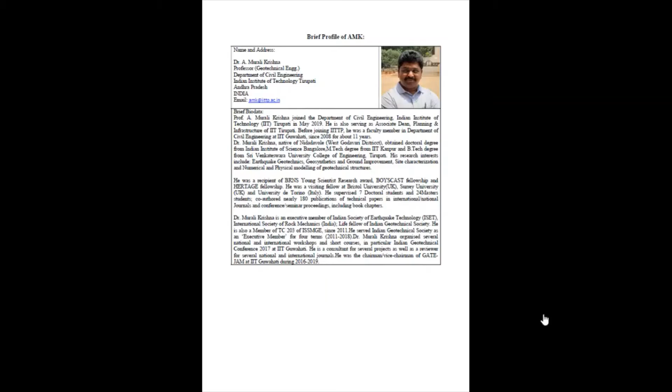Just want to know how many participants are there and who all are there. I can see only a couple of participants, something like that. And how many among them are students and how many are faculty, just to have some idea. Do you have something?

So we have almost around two sections, around 280 students plus faculty around 20. How many joined in this webinar? As of now, around 120, including faculty and students. They may still be joining.

Okay, fine. Coming back to the talk, today I have chosen the topic: sustainable utilization of scrap tire derived geomaterials for civil engineering applications.

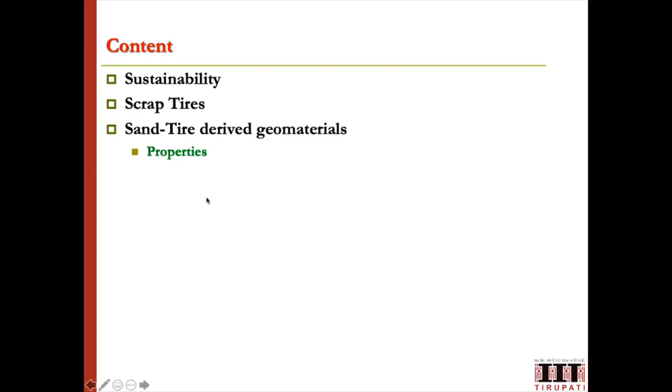The talk will go like this: I'll briefly touch upon what is sustainability, what are the primary components of sustainability, and we'll see some information about scrap tires - what are scrap tires, what are the problems associated with them. Then we'll see the word geomaterial and scrap tire derived geomaterials - what are the various scrap tire derived geomaterials, what are their properties.

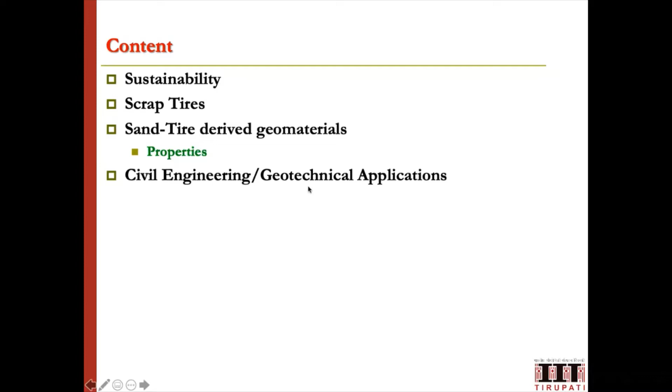Then we'll broadly see various applications in civil engineering, particularly focused on geotechnical applications, and then retaining wall applications, which is basically from my research and my students' research efforts. One master's student and one PhD student worked on using scrap tire derived materials for retaining wall applications. I'll try to explain these applications through model studies and how we are addressing sustainability. The sustainability aspect will also be touched at the end, and then I will conclude with my concluding remarks.

This is broadly the content I have taken here.

Most of this presentation is based on the publication 'Sustainable Utilization of Scrap Tire Derived Geomaterials for Geotechnical Applications,' published in the Indian Geotechnical Journal in 2018, by Dr. S. Bali Reddy, who was my research scholar, and Professor Krishna Reddy, my collaborator. I hope you've all attended his lecture when he visited your institute recently. If anyone is interested to know more details, they can refer to this paper for more references and information.

Coming to sustainability, I'm not going into the topic in depth because it's vast - we could talk several lectures on it, there is a special course on this one. But as a simplified understanding, what sustainability is will be addressed here.

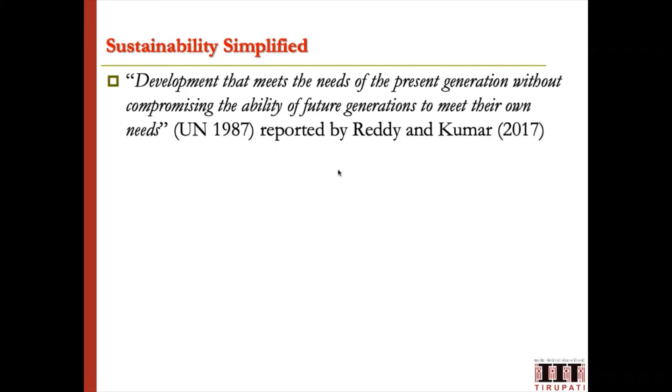Okay, but their requirements also should be able to survive. That's the main object of sustainability over the generations. So sustainability is basically linked with the three E's. It's a triple bottom line concept they highlighted here.

So you see, it will deal with the environment, it will deal with economics, and it will deal with equity. Equity in the sense of society, the people and their requirements; basically societal things will be coming in this equity content. And environment: what are the resources we are trying to use for any application, any infrastructure, and economics at the same time.

For any engineering structure, any engineering concept, we have to balance the economics. So they are all interlinked. The equity, society and environment, they are interlinked. Growth control conflict, as we keep on using the environment more now, and in the future whatever its complications. And similarly, economics, which is linked with this class and property conflict sometimes.

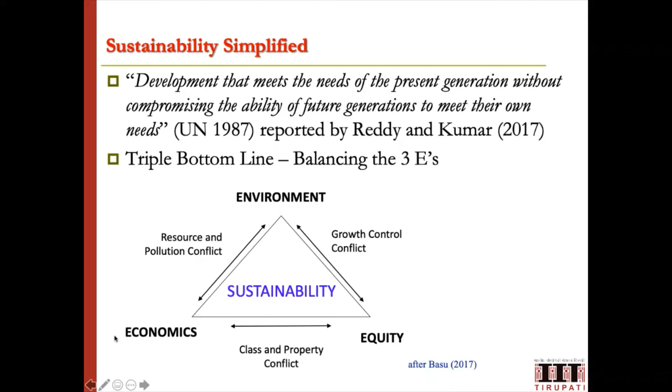If you are making it very costly, the people who can utilize it will be less. And if you make it more reasonably economical, then many people can use this, but they will complement each other. And then environment and economics, again they will be linked in terms of resource and pollution conflict. We have to minimize the pollution when we are balancing the environment.

At the same time, we have to intelligently, smartly utilize the resources as well, which need to be sustained for generations in future. At the same time, we have to balance economics. It should be an economical project. So they are all interlinked.

In a nutshell, maintaining this environmental need, economic need and equity need in terms of the societal requirements: if you are generating any project, any product which is meeting the present day requirements and which can also help the future generation with their requirements, that's how we can maintain sustainability. That's basically sustainability in simplified terms. We will see how sustainability is related to our today's topic.

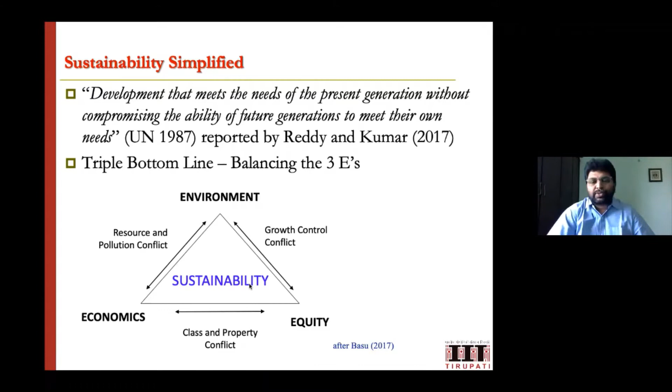So in future, the increase will be significant in developing countries like India. Of course, now we are almost functioning like developed countries, but still we are on the verge of some sort of development. We can see a much higher level of development.

So what are the issues with scrap tires? As mentioned in the earlier slide, the rate of generation is very significant. You see huge amounts of scrap tires are being generated. What is the main problem? They are bulky materials, like in this form, used materials. These are all from small regular motorized vehicles.

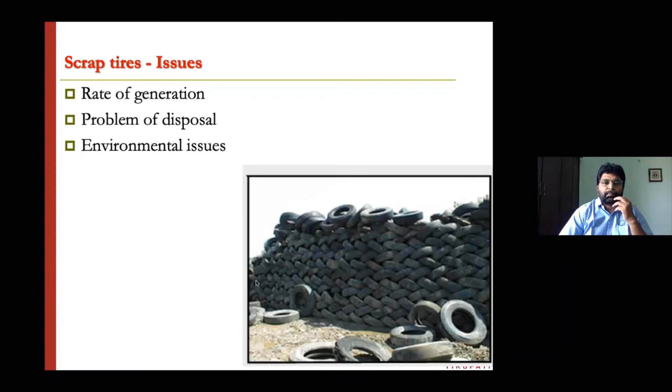So the way to solve these particular issues in a sustainability approach is to see the possible use of these waste materials for various applications. This is the sustainability approach. That means, what is the approach here? A waste material we are trying to use for some application.

That way we can consume some of the waste material, and we can also reduce the disposal of the waste to some extent. It may not be complete, but to some extent. So accordingly, we can reduce the problem of disposal to some extent, and the associated environmental issues also can be taken care of, because anyway we can't have any control over the rate of generation. Only the second two points can be handled if we properly explore the sustainability approach in the utilization of waste scrap tire material for various applications.

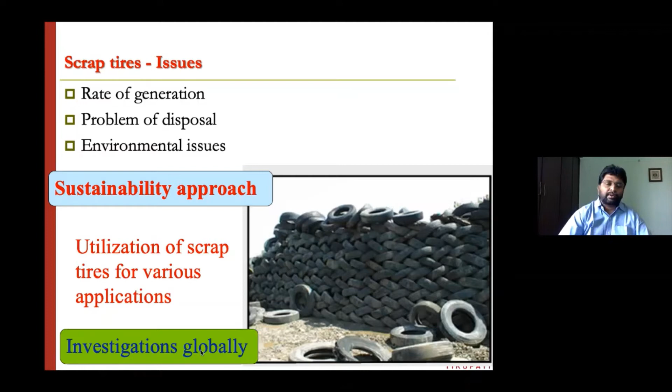So how are they utilizing them? The earlier slide showed some scrap tires are being utilized for various applications. Which industry, which sector is using them? This slide gives you some information, again for 2002. You can see civil engineering application, which is our current focus, is using about 14.2%, whereas other things use different percentages. Another major use here is tire derived fuel. Again, it has environmental issues; it will release a lot of pollutant gases and other things. It is not advised to use it for tire derived fuel, but yes, people are using it in different percentages.

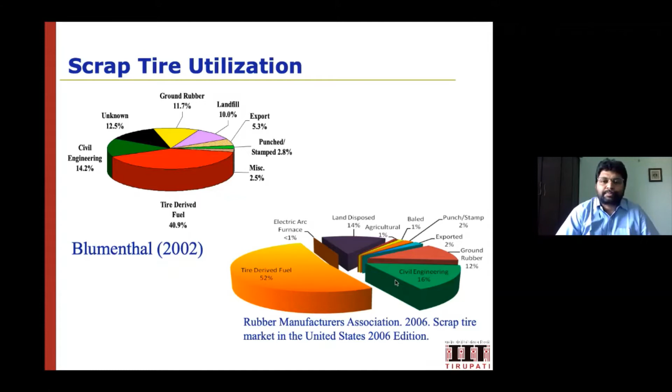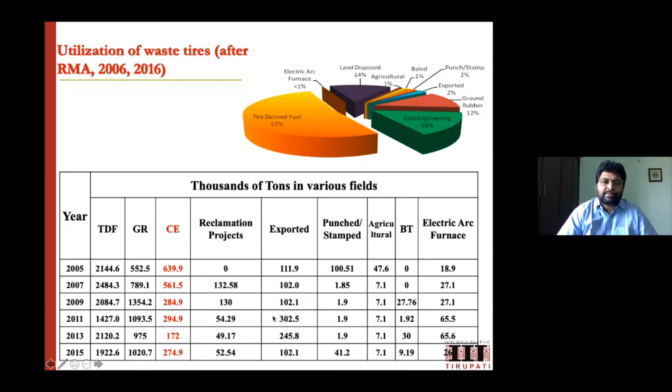Coming to the 2006 statistics, I want to draw your attention to the relative increase in the percentage of civil engineering applications. Here 14.2% was reported in 2002; in 2006 it was about 16%. There is a slight increase in civil engineering applications, so people are using scrap tires in civil engineering. This shows various utilization of scrap tires in more detail across the years 2005 to 2015, in thousands of tons in various fields, such as tire derived fuel and civil engineering application. What to observe here is that for civil engineering application, use of scrap tires is decreasing. So that's some background about scrap tires being used for various applications.

Now, coming to scrap tire derived materials, what materials can be obtained from scrap tires? One way to use scrap tires is to use the tire as a whole, as a very bulky tire which has a lot of mass. Otherwise, we can cut them into different sizes of pieces. There is an ASTM standard on use of scrap tires in civil engineering applications, which is our current focus. This ASTM standard shows the different sizes and what they are called.

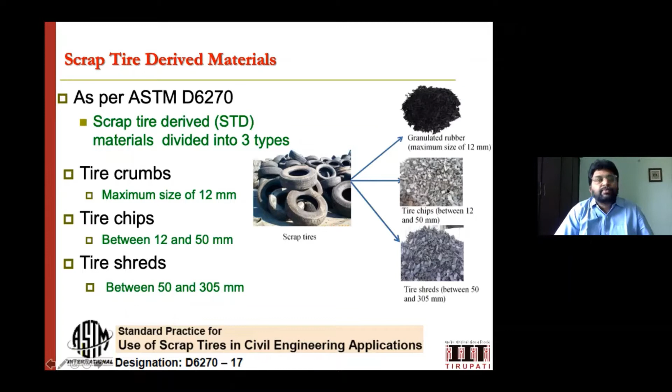It's broadly divided into three types. One is tire crumbs, maximum size of 12 mm, which you will see in this form. Tire chips, between 12 and 50 mm, which look like this. And tire shreds, ranging from 50 to 305 mm, 1 foot size. Imagine cutting big tires into 1 foot size pieces; you get big tire shreds in this form. So depending on the application, one can choose which size of tire derived material is suitable, and accordingly pick that particular material.

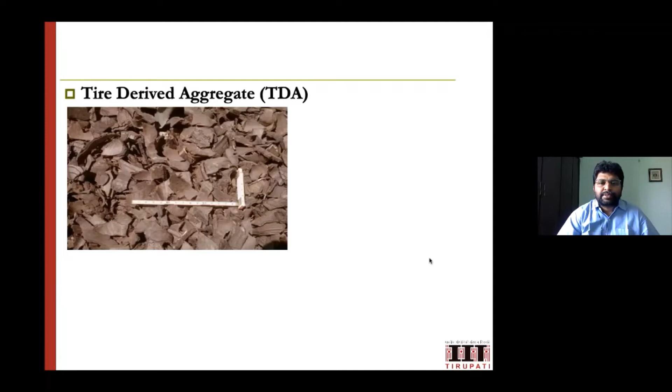So besides this, tire derived aggregate is another terminology which is now being practiced extensively, using the tire with some other material. Then there is crushed rubber from waste tire. Other than the earlier three materials and tire derived aggregate, if you make this into a very crushed, finer form, you can use this as crushed rubber, which was recently reported in 2018.

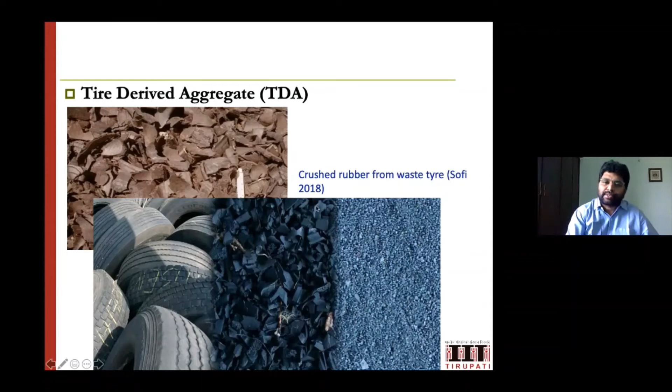Now we understood what scrap tires are and what the scrap tire derived materials are. Now we'll go a little bit into the engineering part of the application. For engineering applications, we need to have the properties of any material. Otherwise, we can't just take the material and use it, because there is a lot of engineering we have to do. So keeping that in mind, several researchers have studied the use of tire derived materials of different sizes, so we need to understand different sizes and their properties also.

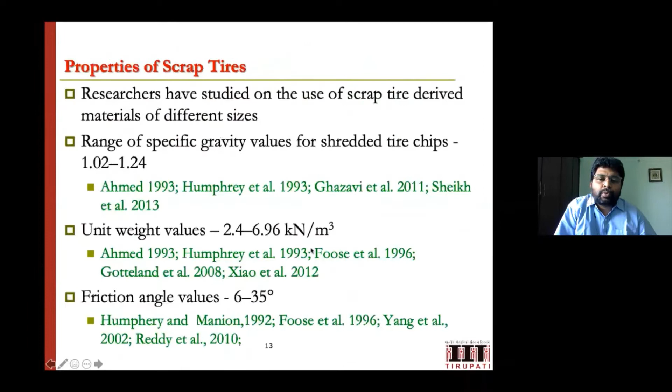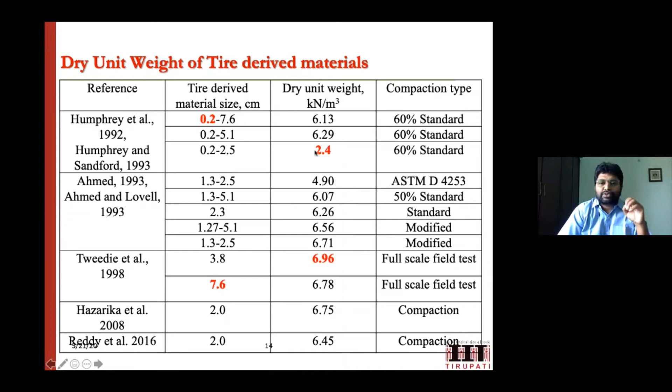And the corresponding values, range of the values, you can see 2.4 to 6.9 we were shown in the earlier slide. And you can see the other engineering properties. For example, hydraulic conductivity is shown here. What's the range of hydraulic conductivity values? What's the range of the void ratio values?

And next, going to the shear strength parameters. So in terms of the C, cohesion, and in terms of the friction angle phi, what's the range of the values? How different sizes of the scrap tire materials they can show. You can see the cohesion values reported here ranging from 4.3 to 82 kilonewton per meter square, and friction angle, as I showed in the earlier slide, 6 to 38 degrees was reported. Okay. So these are different values.

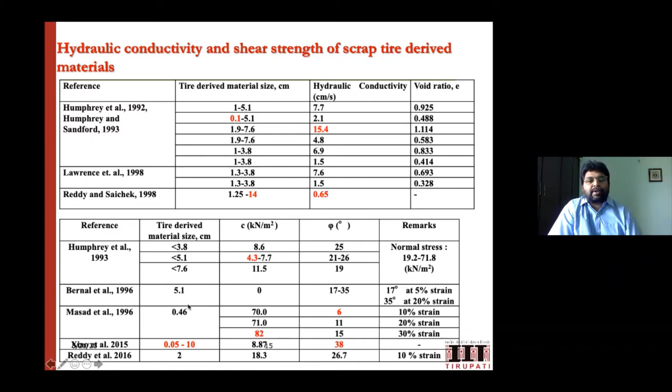Now, so these are the STDs, scrap tire derived materials, and their properties. The use of the STD materials, how we can use them as an engineering application, particularly in civil engineering applications. You can see STD materials are used in a wide range of civil engineering applications due to the advantages in their properties. We have seen the property values, and most of us know the durability of the material.

So it has high durability, low compacted dry density and thermal conductivity, high hydraulic conductivity, and high compressibility, and is able to absorb. When you are keeping the scrap tires, they have a lot of voids, they can get compressed, they can absorb a lot of vibration. This is another good property we can get from the scrap tire derived materials.

So large studies are available on pure sand-tire derived materials applications, particularly for engineering applications, in terms of physical, numerical, and field model studies in the context of retaining walls, foundations, embankments, etc. So here particularly it is focused on geotechnical applications, and different studies have been reported in that.

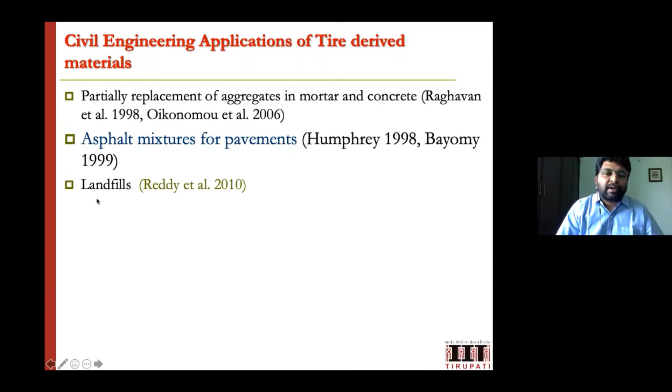Okay, with that, we'll just see broadly what are the different civil engineering applications this material can be used for. One is the partial replacement of aggregates in mortar and concrete, which was reported by these researchers. And in terms of asphalt mixtures for pavements, which were reported by these researchers. They can also be used in landfills, massive landfills, and the backfilling of retaining wall materials, which is the current focus here. That's why it's highlighted here.

Different researchers have used them here, and as we understood from their basic property, they have high permeability, so they can also be used as a drainage material, as a drainage system. Further, it can be used for reinforcement purposes, and highway embankments; not only pavements, they can be used to build huge volumes of embankments also.

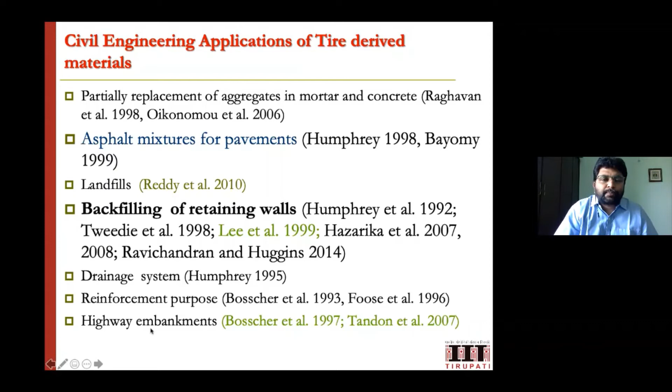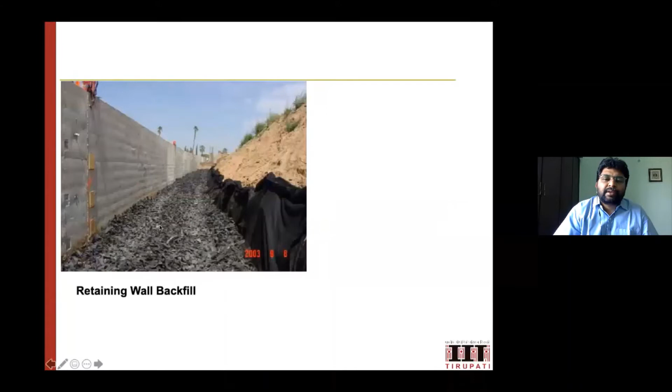And vibration damping layers beneath the rail lines are used, and the retaining wall backfill. There are some studies on the retaining wall backfill with such compressible materials. So protection of seawall by using whole tires; as I mentioned, whole tires can be used directly for protecting the seawall or certain embankments, which can absorb a lot of energy.

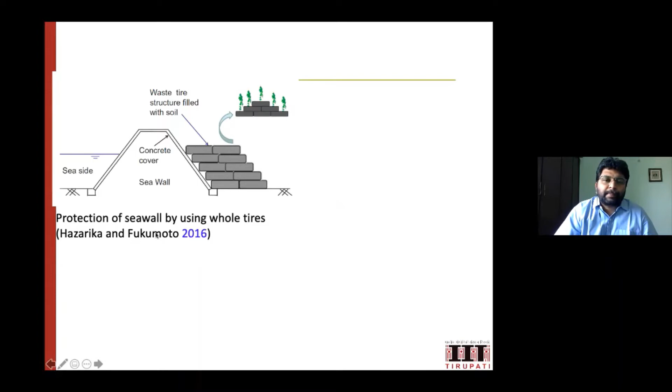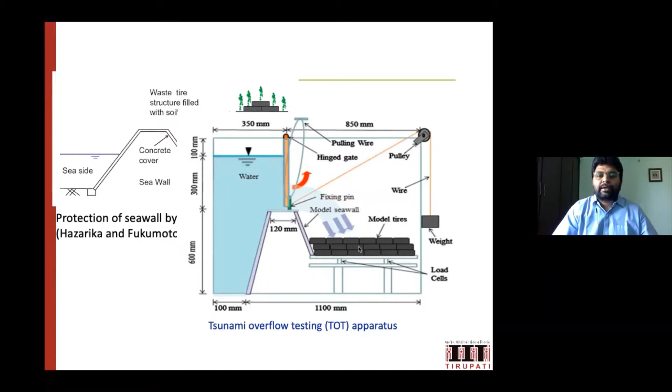Tsunami overflow testing apparatus. This is the study again conducted by Hazarika and group. The tsunami overflow is happening, and if you keep this huge volume of whole tires here, they work like very good dampers. They damp a lot of energy, and further losses and damages due to this water will be very less.

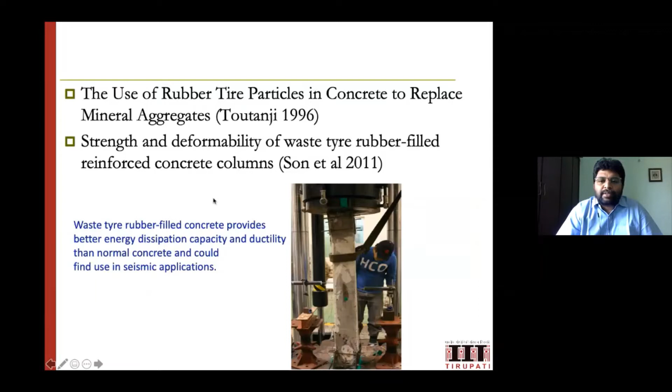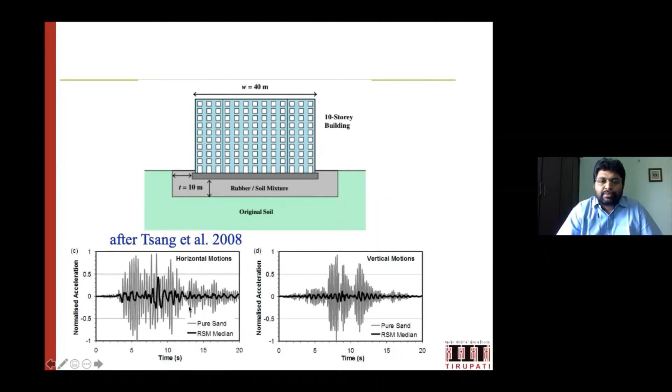This is one study where they showed base isolation using a rubber-soil mixture. A structure at the base uses the rubber and soil mixture, which is being tested to show it is absorbing those vibrations. So that's about civil engineering applications in general: in terms of pavement structures, retaining structures, embankments, even buildings, and tires alone can be used as geotechnical structures also.

Now, coming to the geotechnical applications, what are the advantages one can get when using these scrap tire materials in geotechnical applications? One is that it creates a sustainable future. Referring to the earlier sustainability concepts, right? If you are able to use the tires in applications, you are reducing the waste, you are reducing the disposal problems, and some significant part of natural material is being replaced by this waste material. That means you are reserving some of the natural material for the future generation. So in that way, we are trying to maintain the sustainability.

So it creates a sustainable future, and it can also be used for reducing the vibration. It can also be used to protect the pipelines which are buried in the ground, because it has a lot of cushion and absorbing behavior.

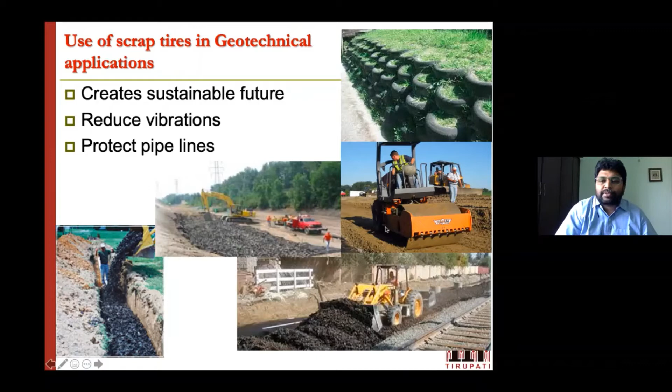Some of the applications again shown in the context of geotechnical applications. Some of these things we have seen earlier also, like whole tires forming a small retention system. It's an embankment, this is a drain system, and a subsurface drain in railway lines. One can see this one. Using the tire mixture in the pavement system. So there are various applications one can think of. Particularly in the earth retention systems, which we'll be focusing on a little bit more, it can be used.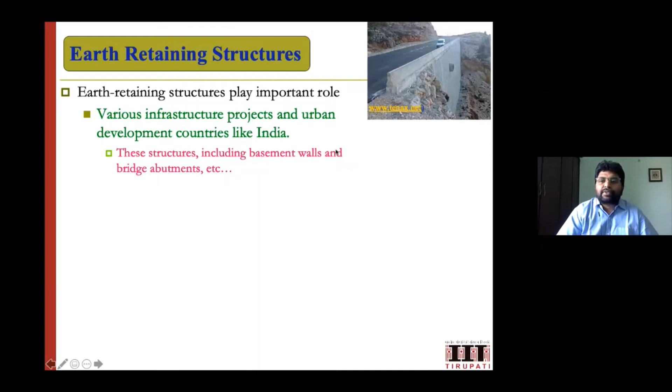These earth retention systems are invariably being used in various infrastructures in urban developing countries, because as we are doing more development, more construction, many retention systems are required, in different forms like basement walls, bridge abutments, and other things. So performance of these earth retention systems, retaining walls, basically depends on the type of the backfill soil, isn't it? Depending on the backfill soil, how much earth pressure is coming onto the wall is decided, and the design of the wall structure also depends on how much pressure it is getting.

So preferably the backfill material should be a clean, granular, cohesionless material, because it should be easily drainable. There should not be any excess pore water pressures which will cause detrimental effects on the retaining structures. So to reduce the pressure coming onto the structure and to reduce the demand, one can go for lightweight materials. Different lightweight materials can be listed as tire-derived geomaterials, EPS geofoam, lightweight aggregates, or wood fiber.

And of course, fly ash and slag, blast furnace slag. Indian researchers are predominantly using these, because different mines and thermal plants are generating this slag and fly ash. So on the other side of today's topic, use of slag and fly ash is also a sort of sustainable application, which can be explored if somebody is interested.

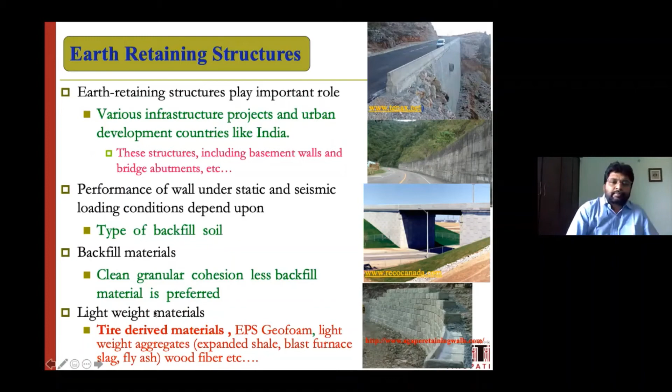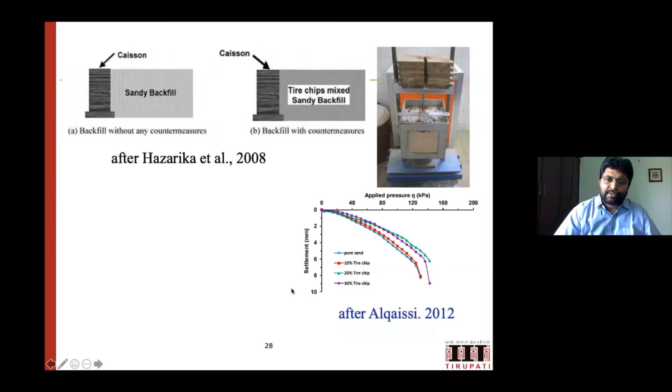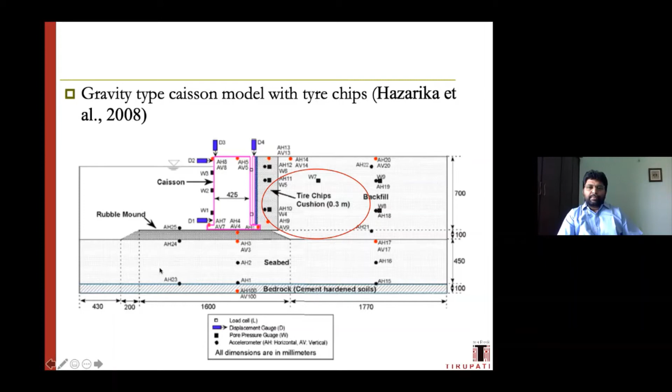So using the scrap tire material as alternative backfills, under static and seismic conditions. Different researchers have worked here. This is the abutment here. This is the retaining wall application where they have used it as backfill. They have done some studies and shown the effectiveness of these materials. One more study here by Hazarika et al. 2008. They used a gravity-type caisson model with tire materials. This is a gravity-type wall, and they used a tire chip cushion here. Various instrumentation was used, accelerometers and pressure sensors, to see the response as a model study.

This is another study for an embankment. A thermometer was used, settlement plates were installed at different elevations, and a horizontal inclinometer like this one. They studied a particular model, and then they started application in the real field. Why I am saying all these things is that gradually we are looking into the material properties and their application. Before going to systematic application in the field, one needs to do thorough studies in terms of numerical simulations, analytical calculations, or model studies. These are the model studies which show how different people are using them.

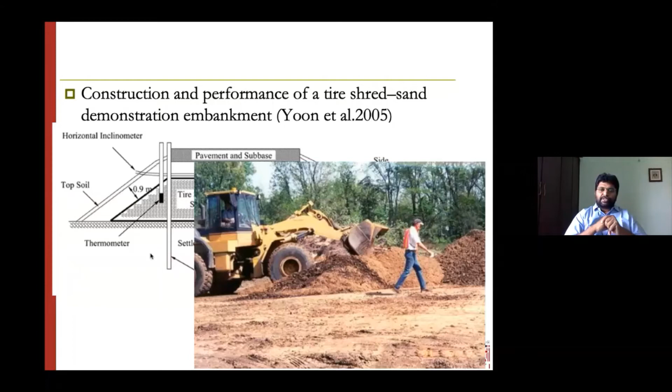Okay, so that's about the overall view of scrap tires and tire-derived materials in various civil engineering applications. Now I am taking you to our research group activity, which was the use of tire-derived materials in geotechnical applications, particularly in retaining wall applications.

What my students try to do is use tire derived materials, these are tire chips. Here we have taken 10 mm by 20 mm size, 10 mm cross section square and approximately 20 mm long. You can see a closer view.

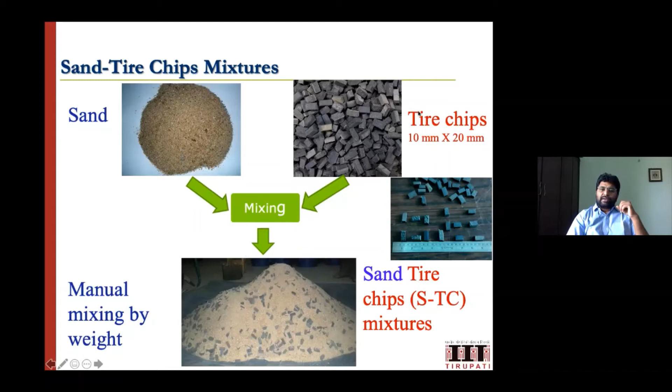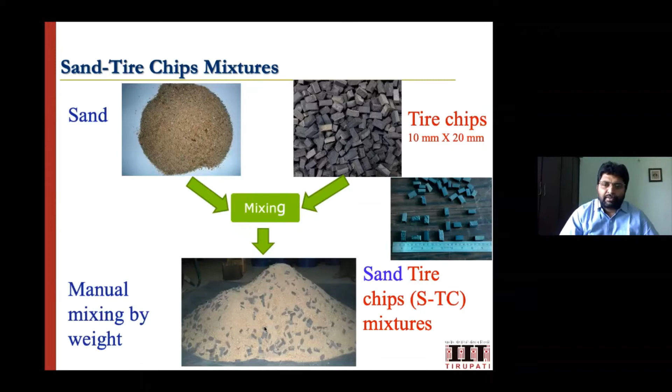These tire chips were mixed with sand to create sand tire chip mixes, STC mixes. So this is the sand and tire chips mixed together to form this material. This is the material created, and then we did characterization, finding different properties, and then using it in application. This is what happened here.

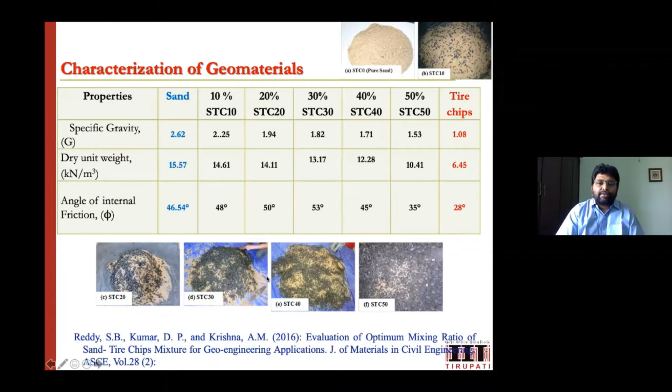One can refer to this particular paper in the ASCE Journal of Materials in Civil Engineering, published in 2016. The values obtained and shown in the earlier slide were presented in graphical form for better representation.

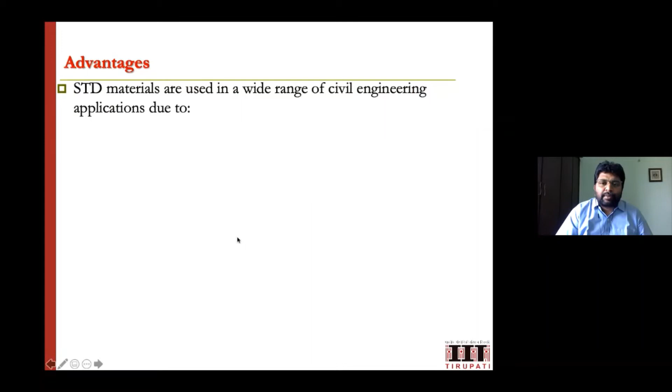If you focus on this material range, we can get the advantages such as high durability constituents of the tires, low dry density, thermal conductivity, high hydraulic conductivity, and high compressibility. These are some of the properties we have seen earlier, all obtained from basic material characteristics.

Now that we have characterized the material alone, we are moving to the application. Our focus in this talk is to show retaining wall applications. Our students have tried to do some model studies to see the response of retaining walls using tire chip derived materials.

For this purpose, we built rigid-faced wall models of 600 mm height and 600 mm length of the wall. This model wall was built in a Perspex container, 1200 mm long, 600 mm wide, and 1000 mm height.

This is a Perspex container wall. The wall facing was built with hollow rectangular sections, and I will show them here. They are connected by different connecting rods.

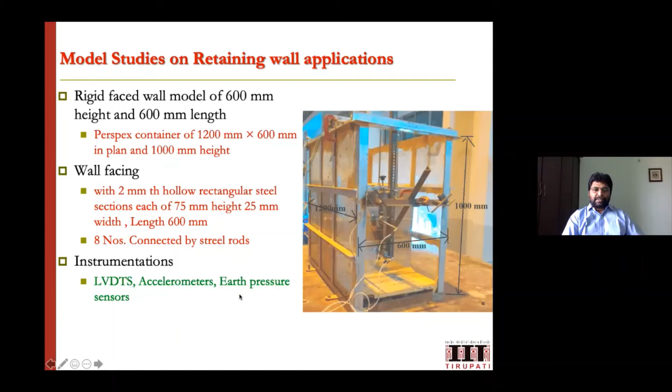Various instrumentations were used: LVDTs to measure displacements, accelerometers to see acceleration response, and earth pressure sensors to see the pressure acting on the wall. This is how the physical model wall was developed.

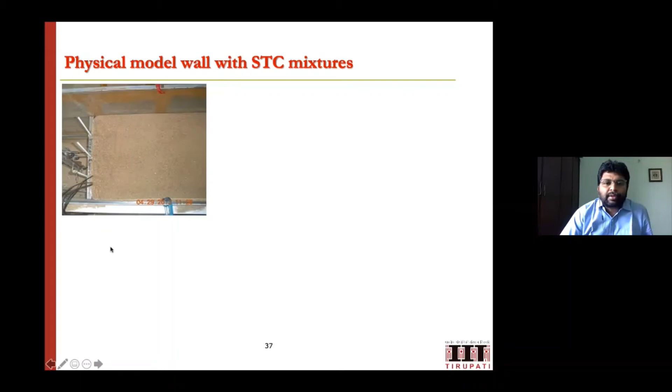This is the wall facing as mentioned, with sand and sand-tire chip mixtures. It was put in different layers and compacted at each layer. Before making this model wall, several trials were done to check what percentage mix, what density, and what unit weight we are obtaining. Different trials were done, and accordingly the model was prepared.

At the top, surcharge was applied in terms of concrete blocks. These are the LVDTs which were placed on the face of the wall to see the wall deformation, and one can measure that.

As a study, we have conducted both static and dynamic study. For the static study, static surcharges were applied in terms of concrete blocks. In the dynamic study, we applied different types of earthquake excitation, seismic excitation, to see the wall behavior.

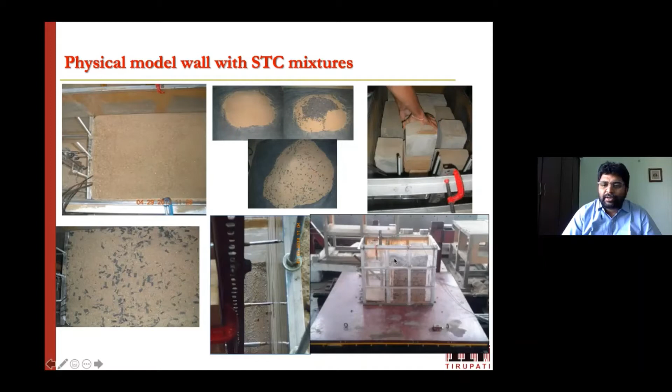This is the shaking table available at IIT Guwahati. On the shaking table, the model container was placed, and inside it you can see the wall prepared. These are the earth pressure sensors installed inside, these are the LVDTs, and these are the MEMS-based accelerometers used to measure acceleration.

All the data during the static test and dynamic test was obtained through the MGC HBM data acquisition system, which was connected directly to the laptop. All the data has been obtained into this data acquisition system.

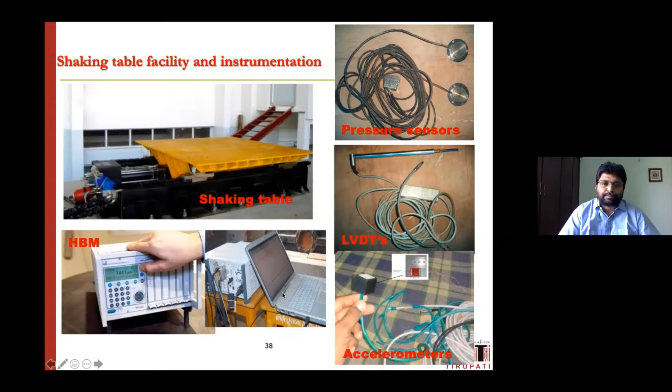So this is the schematic. The earlier picture shows the dimensions and how it is being done. If you look more closely, you can see where the accelerometers were placed. You can see the wall dimensions clearly here: 600 mm height and 600 mm length.

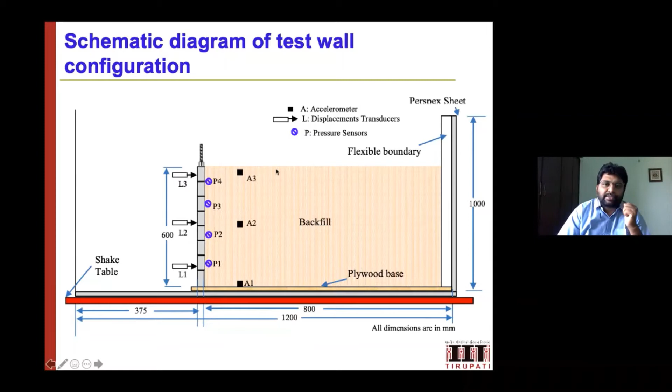Here the backside flexible boundary was placed to avoid boundary effects under dynamic shaking. This shows the other dimensions. Pressure sensors were placed very close to the wall, accelerometers at different elevations, and L1, L2, L3 are the LVDTs placed to see the response. This is how the different model was developed.

There are two series of tests conducted: one static test and one seismic test. The results of these tests were reported in two publications, Reddy and Krishna, and Reddy et al. 2015. The static test involved preparing the model wall with different sand-tire chip mixtures.

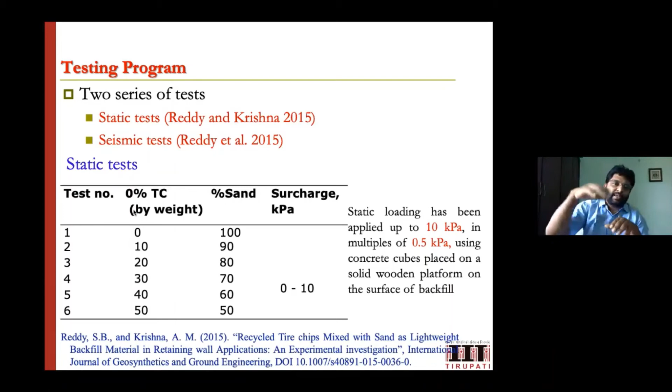We kept applying concrete blocks, increasing the surcharge. You can see the different types of backfill material used: one is 0%, meaning pure sand, and STC 50 means 50% tire chip material. Surcharge was increased gradually from 0 to 10 kilopascal, meaning no surcharge up to maximum pressure applied. This is the publication reporting these tests and details.

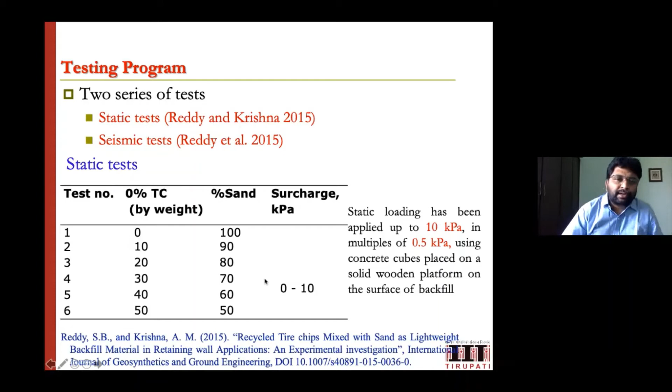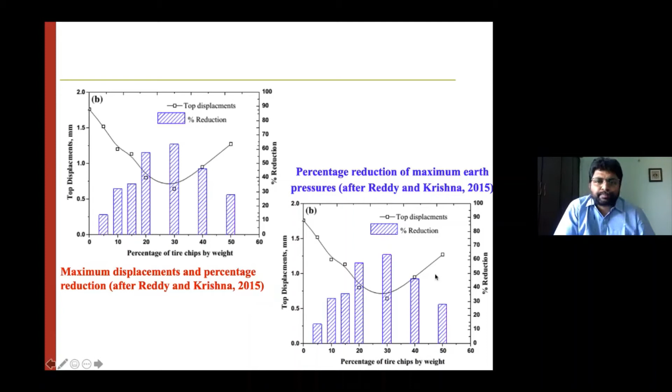So that's about the static test. What is observed in the static test? It was observed that by including the tire chips into the sand, about 30 to 40% of the mixture, that means STC 30 to 40%, we are able to get reduced deformations and reduced earth pressures under static conditions. Now, further, shaking table studies were conducted to see the seismic response.

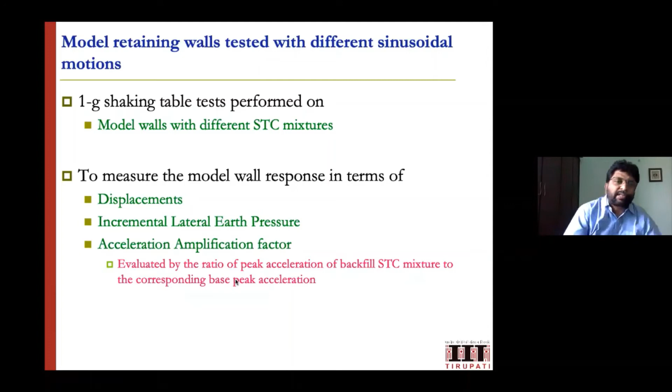So model walls with the different STC mixes were built, to measure the response in terms of the displacements, incremental earth pressures and acceleration amplification factors. So what is the acceleration amplification factor? If you recall the instrumentation figure, accelerometers were placed at the bottom, at the middle, at the top, at different heights. If you normalize the accelerations recorded at different elevations with reference to the acceleration at the base, you can calculate how much it is being amplified. That's the amplification factor, which will be used for further discussion.

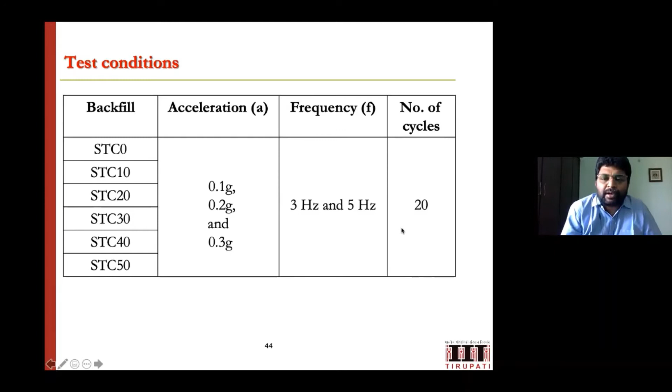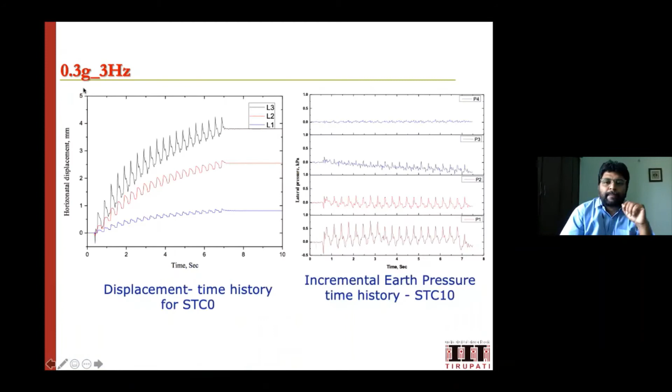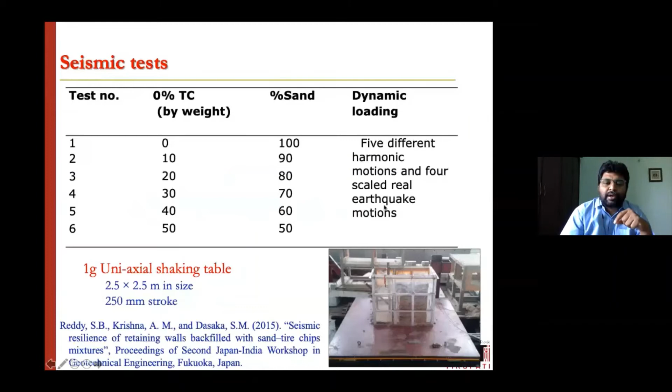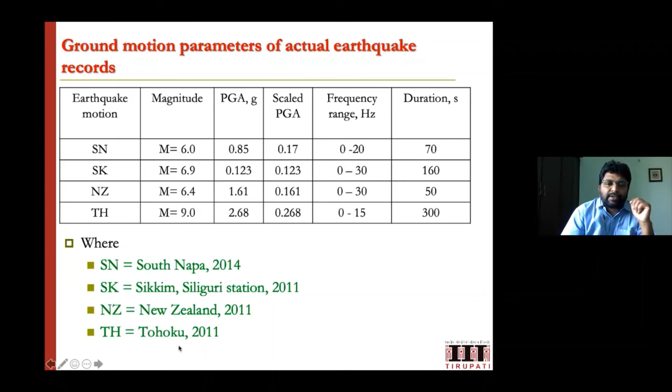Seismic tests using real earthquake motions were also done, whereas the earlier tests were pure sinusoidal tests. 4 different earthquake motions having different magnitudes and different PGA values were used, and the durations are different, from 50 seconds to 300 seconds. These are the codes used for different earthquakes, Tohoku, New Zealand and others. So this is the real earthquake motion and their data.

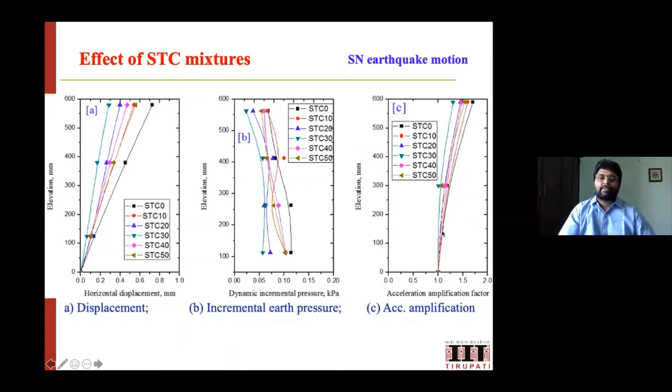When you want to compare the profiles of displacement, incremental earth pressures and acceleration for different STC mixes, this is the data. This black line indicates STC0, only sand backfill, the displacement of the wall for the similar earthquake excitation, and then how different backfill materials vary. This line belongs to STC30. STC30 showed very less deformations and very less amplifications compared to the other materials. This is the observation as a whole.

So that is one particular model of retaining wall using the rigid faced wall, and its behavior. We also studied another type of wall; I hope you can all recall the model wall. This is the cantilever type retaining wall model, which is more commonly used in application. This wall was built with foundation material and some embedment. This is more realistic, and the backfill material was replaced with different mixes.

So this model wall was developed using 2 mm thick hollow rectangular aluminum sections. They were joined together to form a cantilever model wall. Somebody can just add one more section to increase the length, or remove a section to change the toe, base, heel, and height of the wall. One can try this if interested in doing some model studies.

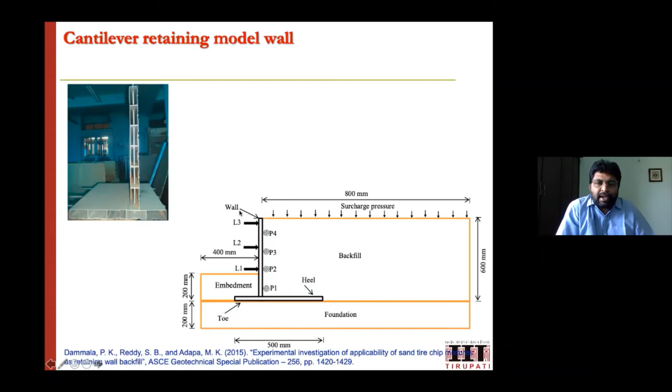Of course, for this particular study, we didn't vary much; only one particular configuration was studied. Again, you can see L1, L2, L3 LVDTs, and P1, P2, P3, P4 pressure sensors placed here. So this is the cantilever model wall, and we also measured the top surface deformation using this one.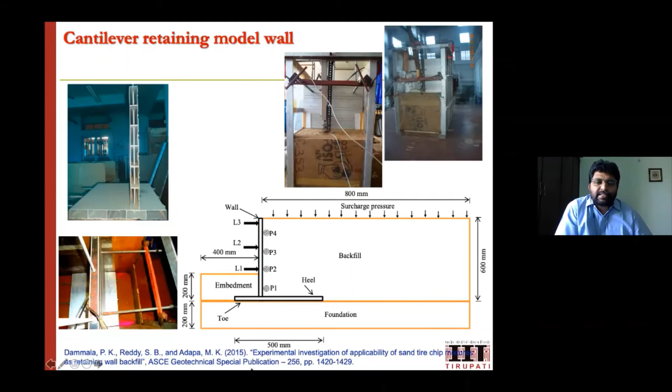The responses, like I mentioned earlier, displacement histories, accelerations, and the profiles in the vertical section, are shown here. That is another mode of wall. The details are available in this particular ASCE special publication. If somebody is interested they can go through it, but I just gave a glimpse of the typical results.

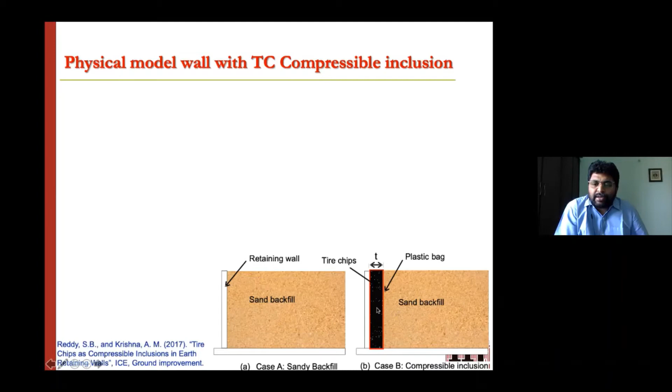Another mode of use of the material is using the tire chip material just behind the wall as a compressible inclusion. This is the third mode of the wall. Here again, it's a rigid faced wall, meaning the wall section is fixed. This is a pure sand fill and this is a sand backfill with a compressible inclusion of tire chips. A plastic bag was used to hold the tire chips so that sand and tire chips do not mix.

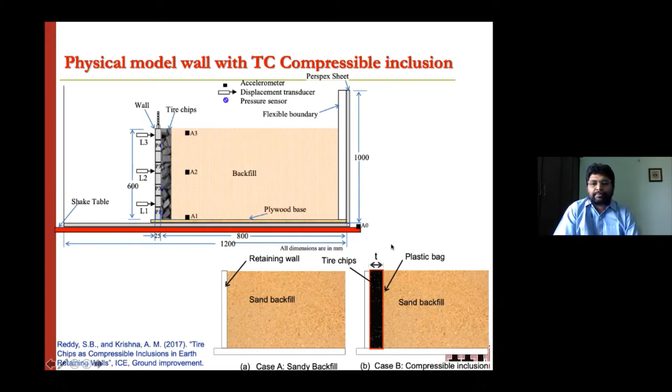This is how the picture looks, with different configurations. Again, LVDTs, accelerometers, and pressure sensors were used to see the response. The details of this study can be seen in the Ground Improvement Journal, published in 2017. Here, the tire chips were used in two different thicknesses, 90 mm and 180 mm. Only three varieties, but the backfill is the same. Static tests were done with 3 to 10 kPa variation.

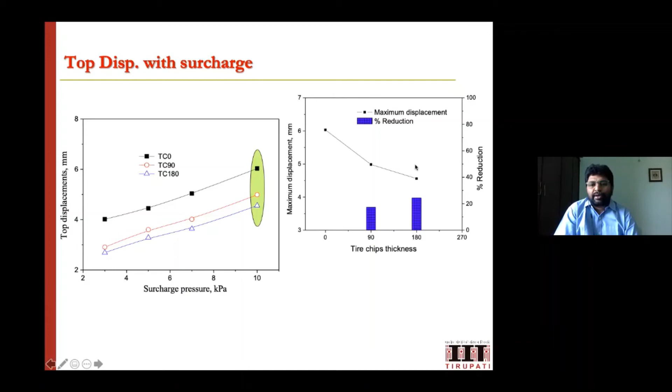You can see with only sand you have a huge top displacement, but if you apply the compressible inclusion, you get significantly lesser top displacement. The maximum displacements at 10 kPa surcharge were plotted here, with the percentage reduction in displacements. Similarly, maximum lateral earth pressures are plotted with the percentage reduction. So you got about 30 to 70% reduction in the earth pressure.

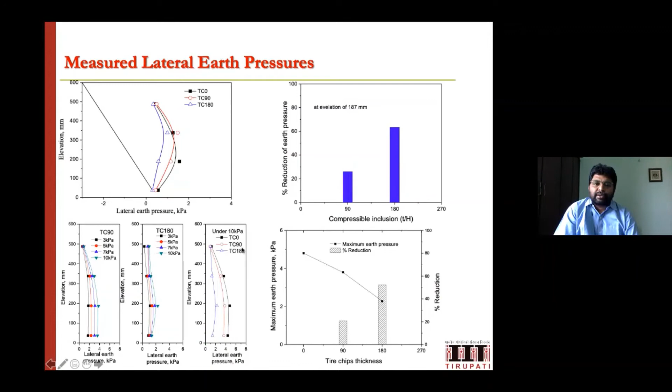So that is the advantage of using sand tire chip derived material as a mixture in different modes of walls: the rigid faced wall, the cantilever model wall, and the compressible inclusion. The observations were very encouraging, showing that tire chip material reduces the deformations, pressures, and their demand.

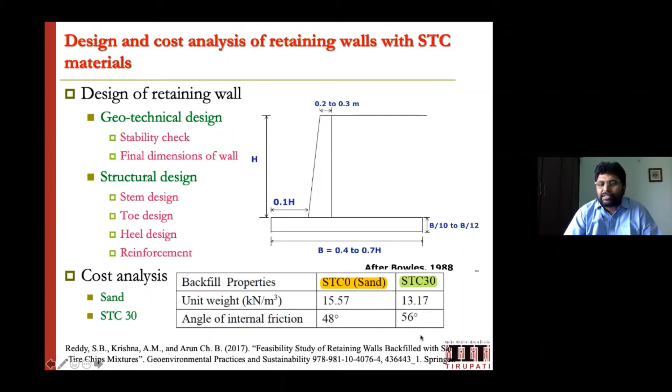You see here for the sand type materials, we have the unit weight of 15.5 kN per meter cube and the friction angle as 48 degrees. For STC30, you can see 13.17 kilonewton per meter cube and 56 degrees as the friction angle. These two parameters were used in the design. So here one can calculate the earth pressure acting on the wall, the earth pressure distribution diagram, and bending moments and all.

I'm not going into the detail, only presenting here the maximum bending moment and maximum shear forces for 2-3 different elements: stem, toe, and heel. So what are the values here? You can see clearly the sand case and STC30 case values. Just by looking into these pictures, one can say that the STC30 mixture is reducing the demand in terms of bending moment resistance and shear force resistance to a reasonable extent.

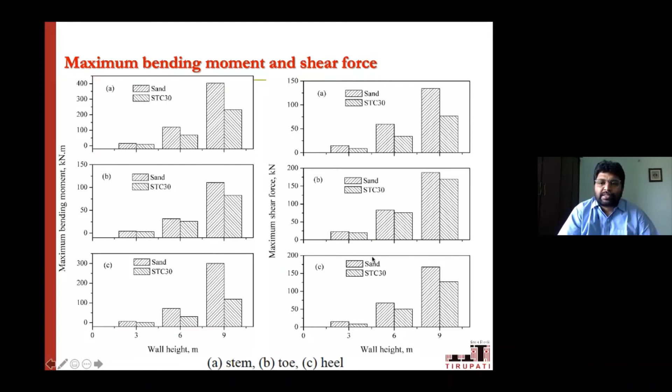Okay, so maximum earth pressures and maximum bending moment and shear forces for the different cases, all these things were done. So finally, based on all this, for the retaining wall with 3 different heights, 3 meters, 6 meters, and 9 meters, with different materials, these are the dimensions arrived at by following the appropriate calculations.

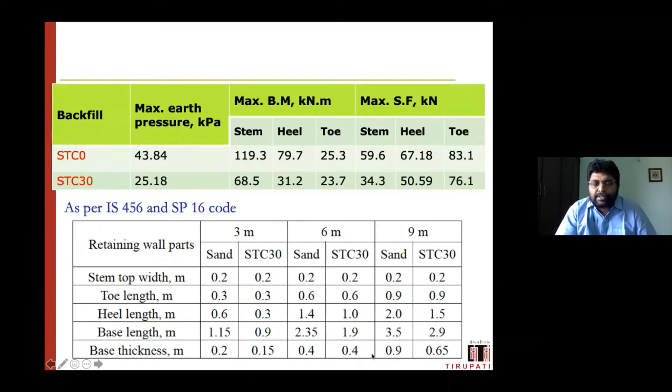Now, for this material design, we got the stem, base, whole wall design, considering the bending moments and the earth pressures. These are the final dimensions. So now, for these dimensions, material cost and the estimated total cost was done. For materials, this is the cost taken here, with different ranges obtained from the local market and from literature also, and the costs taken in this study are shown here.

Steel, cement, aggregate, and tire chips, per kg of tire chips, how much it is costing. All these were taken, and then estimated costs were calculated. You can see for different heights of the wall, using two different materials, sand and STC30, the cost is shown here, and the percentage saving of STC with reference to sand was calculated and shown here. This is the total percentage of saving you are obtaining.

This is only in terms of the backfill material shown here. The estimated total cost, including structural design, reinforcement, and all other things, was also included here. So the total saving we are getting is shown here.

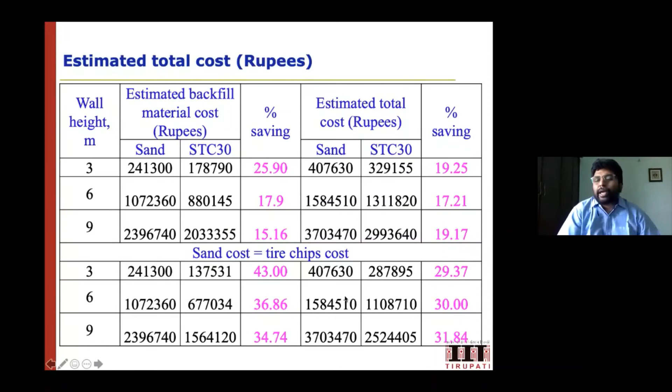So coming to the conclusions. I have given an overview: we started with sustainability and scrap tires, scrap tire materials, properties and applications. And we looked more closely into the research studies one can do, and what we have done particularly in terms of retaining wall applications, and we also evaluated the sustainability concept. These are some of the conclusions I hope you got from the earlier slides. Otherwise, you can just have a look.

STC materials have different advantages and engineering properties which encourage their use for various engineering applications. If you take sand tire chip mixes with about 30 to 40% tire chips, you get more beneficial properties: about 20% reduction in dry unit weight, and they occupy about 50 to 60% of the natural material. Your sand consumption you can reduce by 50 to 60%, and you get more strength as well.

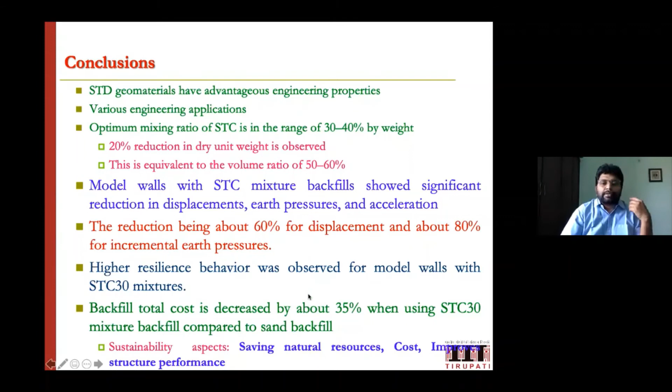Now, going back to the sustainability concept, this particular application meets all the components. We are using the waste material and saving natural resources. We are minimizing the cost, so economics is maintained, and it also improves structural performance. It is more seismically resilient, with more reduction in response. So it satisfies all the requirements of a sustainable structure. That's why we say this is a sustainable utilization of geomaterials for retaining wall applications.

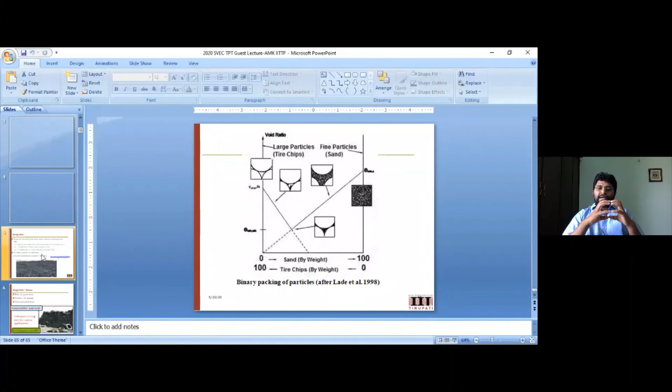Murali, you would like to share something? Yeah, just to add to the answer to Mohit Mistry's question. As you increase the tire chips, as I showed in the picture with sand and tire chips together, up to the 30-40% mixture content, most of the voids in the tire chips are being replaced by sand. They are occupying them, making a compact material.

Beyond 40% tire chip content, the void ratio increases. The volume of sand available is much less than the voids created at higher tire chip percentages. If you recall that figure, the void ratio goes down and then increases beyond 40%. Because of these additional physical voids within the mixture matrix, interaction between particles and tire chips is less. So the peak strength increases to some value and then comes down.

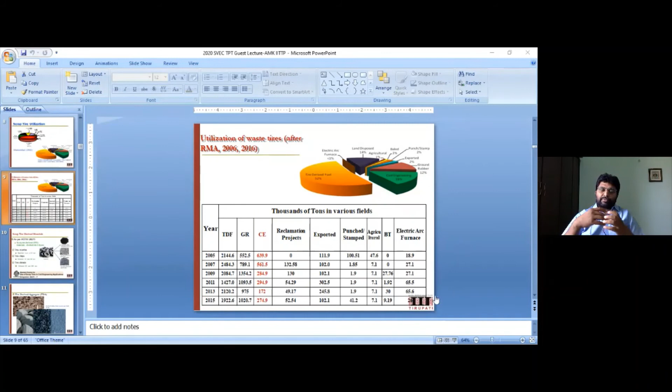Okay, so that's the concept happening. It is related to the strength behavior, which is related with physical behavior - physical in the sense voids and other things which is being taken here. I hope I could answer his question.

Yeah, go ahead with the next question. Then I think you can allow them to ask if anybody is there. I have seen the points and then I could tell you - what is the probable reason for that fluctuation in friction angle? That is what I mentioned, right? Yeah, that is what I mentioned.

Then another question from Kaushik. Tires lose their strength - when they are exposed to water? How can we consider that? Yeah, when they are exposed to water, I just mentioned that also. So when alone water mixing, yes, there is definitely a problem. But when you are using it in the matrix form, the effect will be less. Okay, so accordingly we have to use it.

Again, some question is there on fire also. The other question is, if we use this type of tire chips in RCC - fire related thing, again the same answer. Use the material alone, then yes, there is a probable fire hazard. But when you are using it in mixture, it will neutralize to some extent. But again, you have to use it judiciously.